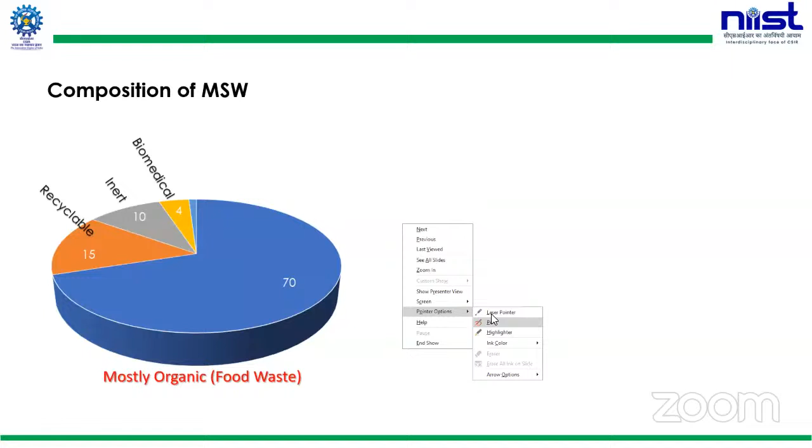So as I said, to begin with solid waste management, I mentioned we'll be talking only on organic waste treatment. So if you look at the composition of MSW, which stands for municipal solid waste, most of the fraction, roughly around 70% of the municipal solid waste, is organic fraction or the food-based fraction. And the recyclable fraction will be around 15%: plastic, paper, glass, electronic waste, all those things come under that category.

There'll be 10% inert material, and biomedical waste that we have to consider separately. In fact, the hazardous waste comes under this biomedical category, and that comes to around 4%, and there is another 1% fraction that we are not considering. So this 70% is a major component of the municipal solid waste.

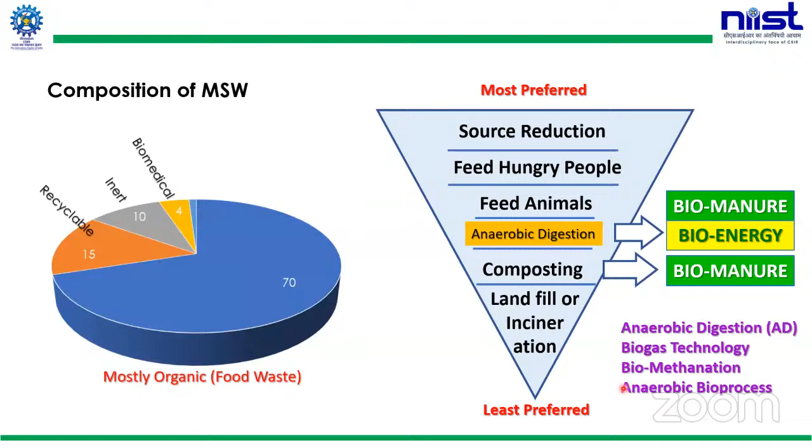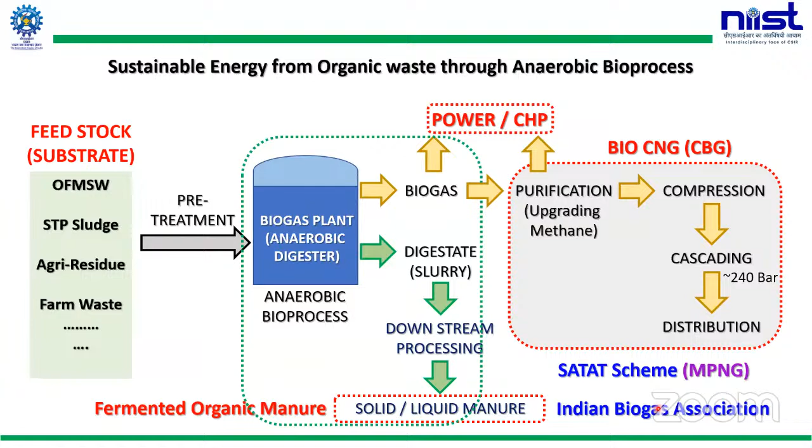Now, I mentioned the SATAT scheme. SATAT stands for Sustainable Alternative Towards Affordable Transportation, which was initiated by the Government of India in 2018 under the National Policy on Biofuels. As I said, it's a very highly ambitious program of the Government of India. The major objectives of the SATAT scheme are to utilize the bio-waste in our country to reduce import dependence on natural gas.

You may be surprised to know we are producing only 7% of our total natural gas consumption. The remaining 93% we are importing from other countries. So the government wanted to reduce our dependence on natural gas imports. For that, the government wanted to promote these kind of programs. Then implementing these kind of plants at different locations in the country will obviously generate a lot of employment, both in rural and urban sectors. So employment generation is another agenda of this program.

Then reduce environmental pollution due to burning of agri residues. So you may know that in the northern part of India, thousands of hectares of land are utilized for agriculture, mostly for wheat and rice. So at the end of every season, there'll be huge quantities of residues or stubble. They'll be burning it, leading to severe environmental pollution in the northern part of India.

So instead of burning this stubble, if you recover highly valuable products like biogas, that can also reduce environmental pollution. So it is estimated that India has the potential for producing nearly 60 million metric tons of CBG and proportionally reduce our dependence on energy imports.

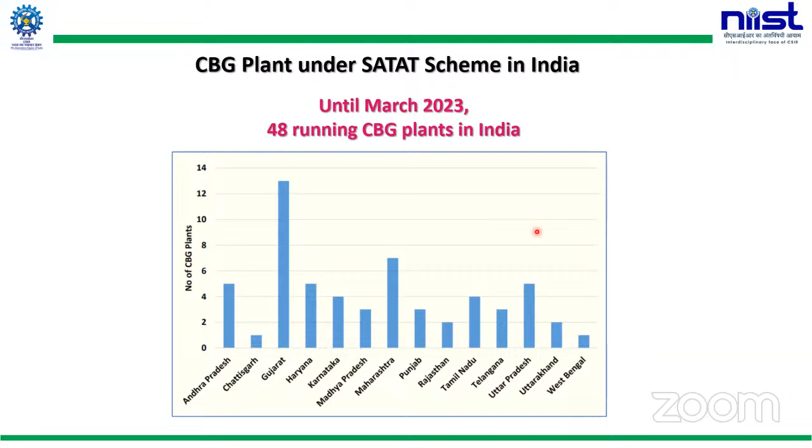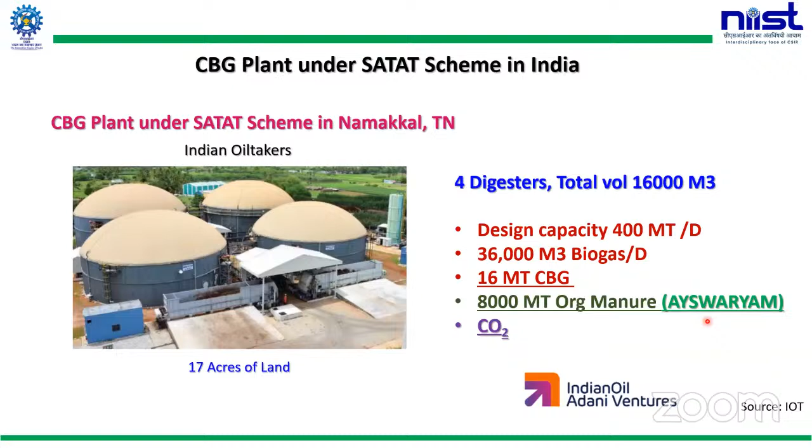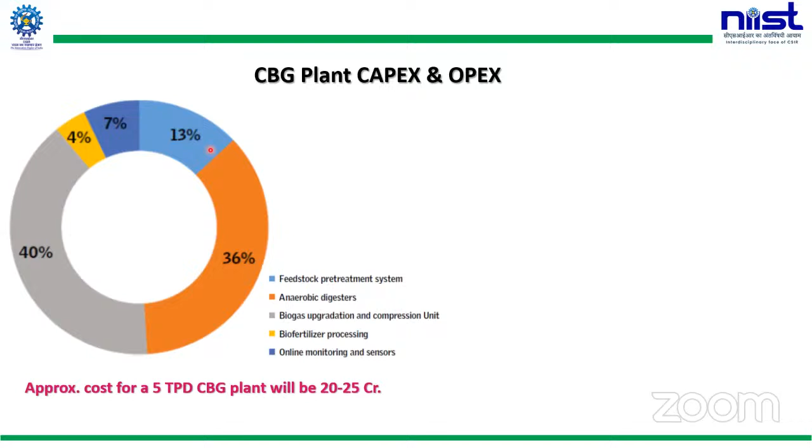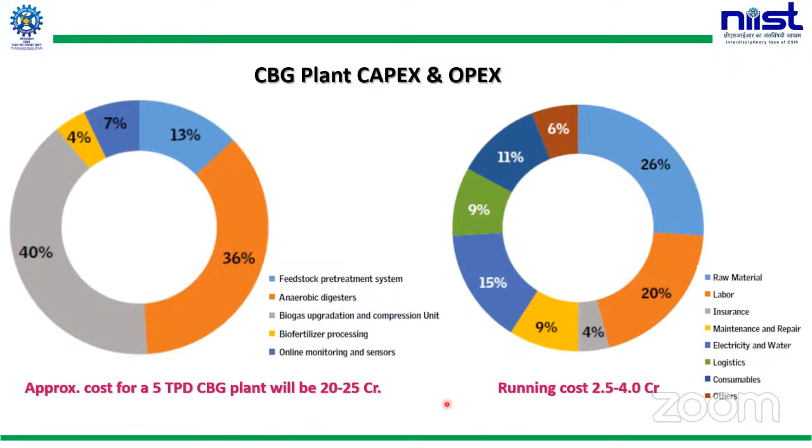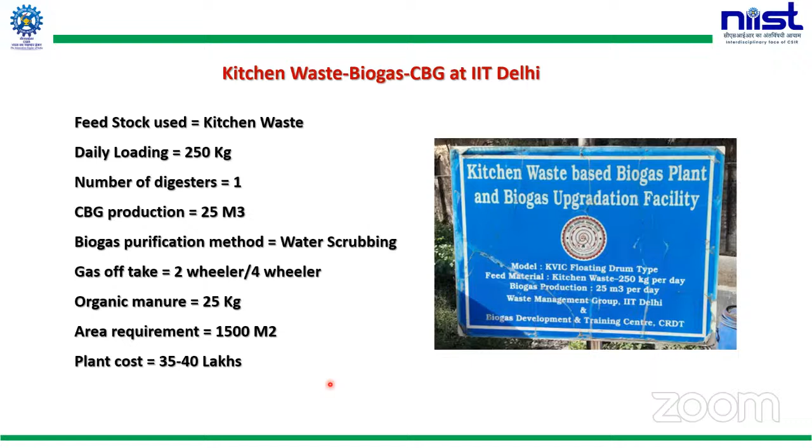Now, if you look at the CBG yield from different feedstocks, as I said, municipal solid waste will give you this biogas yield. So per ton of municipal waste, you'll get around 85 metric cube of biogas. And if you go for purification and compression, the CBG you can expect is only 34 kilo. And for 1 ton of CBG, you need nearly 29.5 tons of waste material.

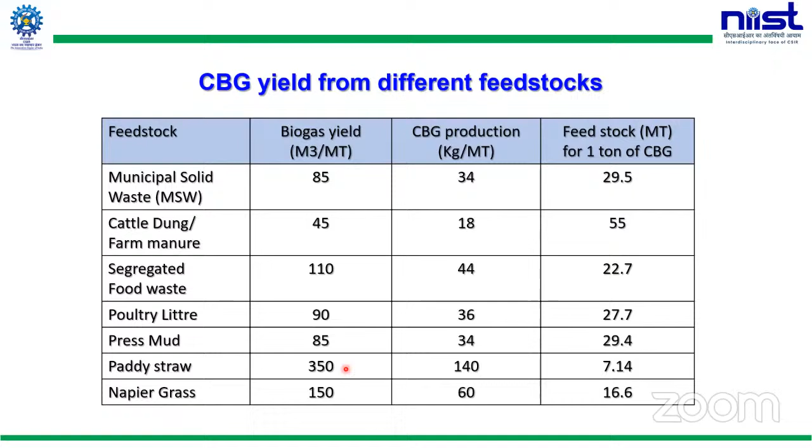And if you consider cattle dung or farm manure, it's slightly less. Poultry litter is slightly higher, press mud again in the same range, plus paddy straw is slightly on the higher side. It depends on what the biogas yield is and all those things.

So this is the BIS standard for the specification of CBG in India. As I said, the methane percentage minimum should be 90%. The mix of CO2, N2, and oxygen, maximum permissible limit is 10%. CO2 alone cannot be beyond 4%. Oxygen alone should not be beyond 0.5%. Total sulfur, including hydrogen sulfide, maximum permissible limit is only 20 milligram per meter cube. And moisture content, the maximum permissible limit is 5 milligram per meter cube.

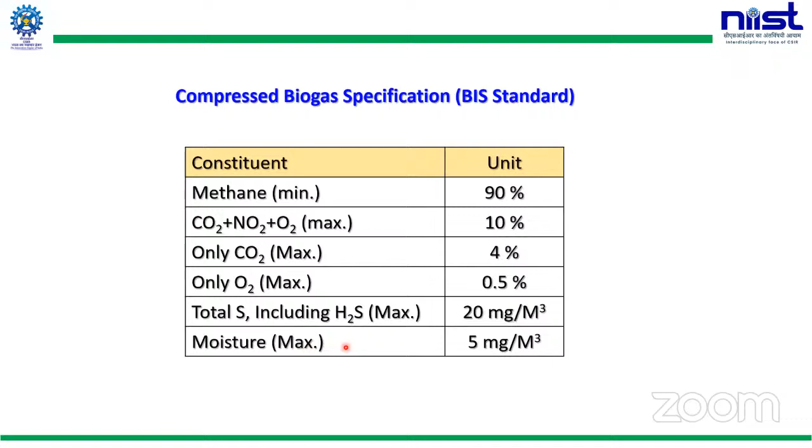Now, if you look at the multi-benefits of bioenergy recovery from bio-waste, as I said, sustainable energy recovery, cut down greenhouse gas emission, and you can earn a lot of carbon credit out of that. Carbon credit is a very broad topic; we're not going into the details of that. And it's, of course, a sustainable waste management practice, and it will also support sustainable food production through the use of organic fertilizer replacing chemical fertilizers.

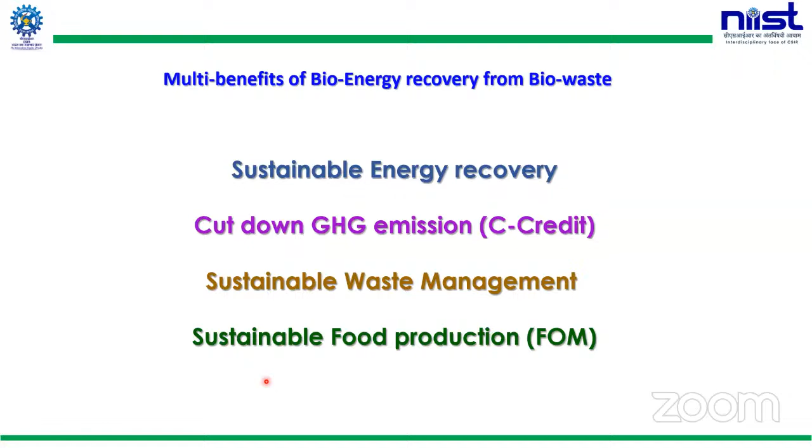So having said this broad picture, I'll draw your attention to this table, which is data from Kerala Suchitwa Mission, sanctioned decentralized waste treatment units until 2019. Suchitwa Mission is one of the nodal agencies in Kerala. They're promoting a lot of waste management practices through different subsidies. Until 2019, nearly 16 lakhs of different units have been promoted. Out of that, 90% of all the treatment units are in the composting sector. Only 10% is in the biogas sector.

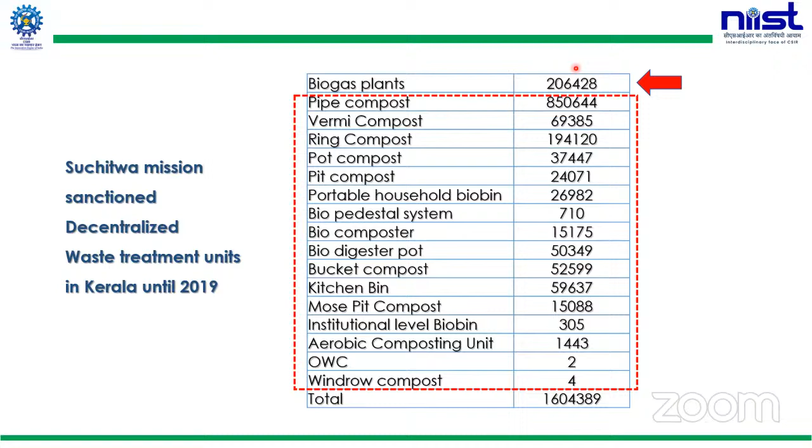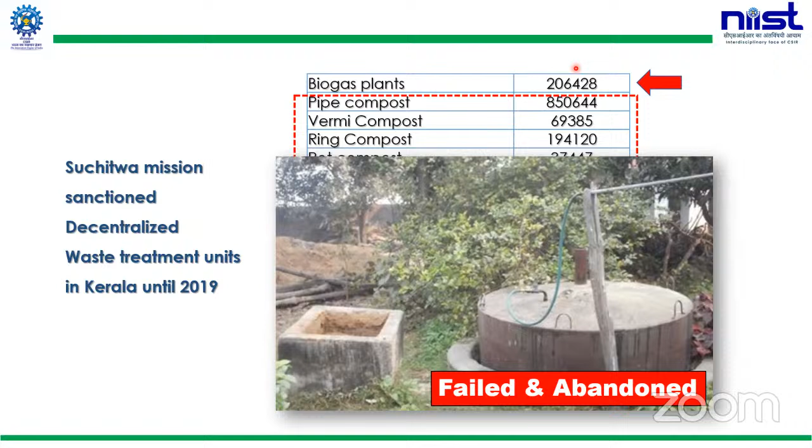And if you look at the status of these biogas plants, unfortunately, many of them have failed or are abandoned. You can see a large number of even household level biogas plants have failed, and community level biogas plants too. You can find n number of biogas plants at many locations in Kerala. They failed because of many reasons.

So if you look at biomethanation based energy systems, biomethanation is not a new technology; it's an age-old technology inspired from nature. Ruminant animals like the cow or sheep take organic residue as grass, process it within their stomach, and produce dung, which is nothing but organic manure. And it is also releasing a lot of methane into the air. A mature cow approximately releases 70 to 120 kg methane per year.

And inspired from what is happening in nature, people have developed technology. These are early designs of the biogas technology, popularly known as the KVIC model or the Deena Bandhu model, to the latest advanced design, where community level huge biogas plants handle tons of waste material, producing large quantities of biogas, from which they generate power used for many applications, including heating and electricity production. So this is how the technology development happened.

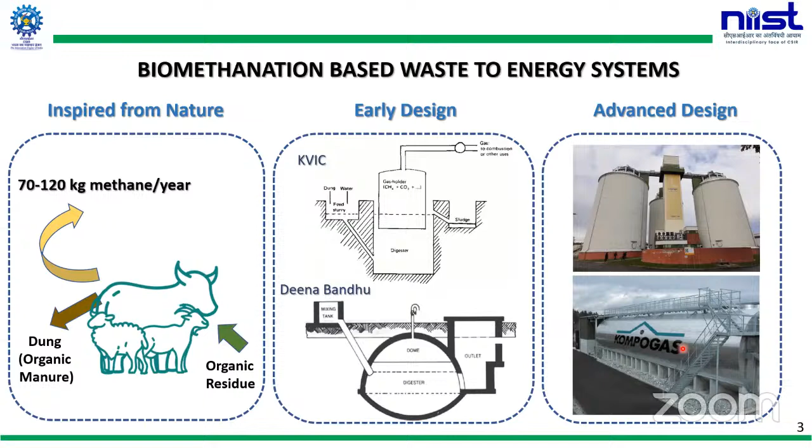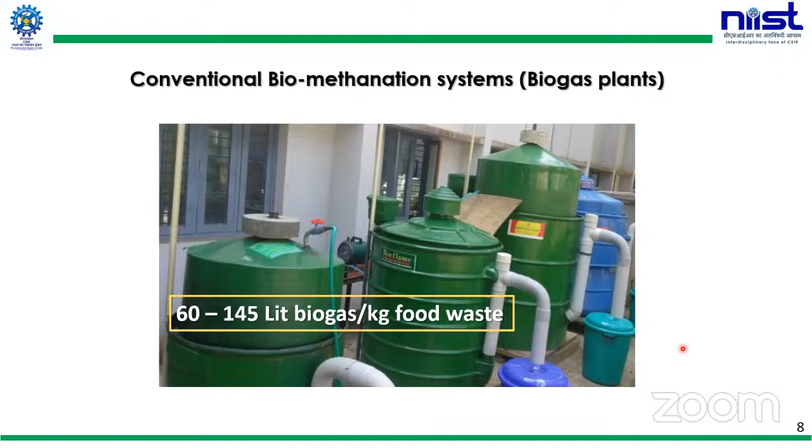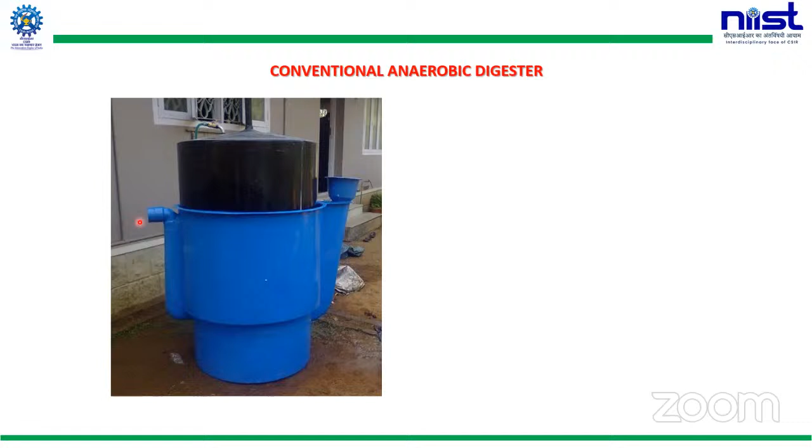And so this is conventional, the same thing as the previous image, only a single unit. What you do is add the waste material here. Something is happening inside, and the biogas gets collected here. The discharge slurry, or the manure, as I mentioned, will be coming out through here.

So if you look at the detail, this is the same port here. You'll be adding the waste material here, directly going inside. There are microorganisms that act upon the waste material and convert it into biogas. That's getting collected here in this dome. As more biogas gets accumulated here, due to buoyancy, it floats up. And you'll have a pipeline here, which directly delivers the biogas to the stove. And the slurry will be coming out through this port.

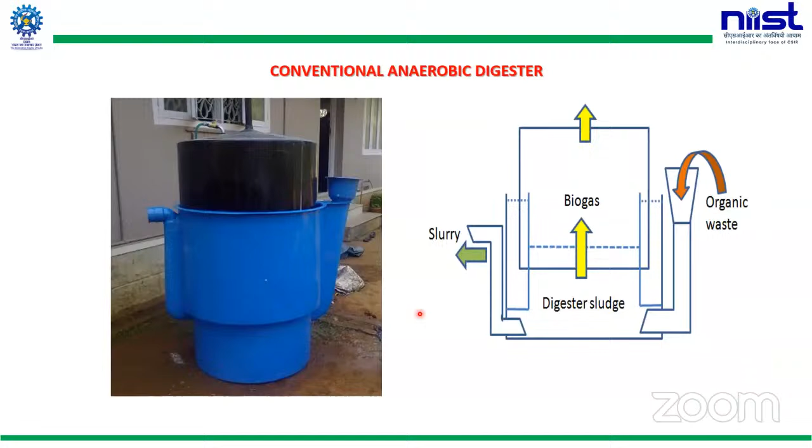And there are certain inherent drawbacks with this conventional technology, because along with the waste material, you need to add water into the system. And there are restrictions, like you should not add certain food fractions like eggshell, lemon, onion, all those things. Guidelines are there. And there is every possibility of mosquito breeding in these kinds of treatment systems.

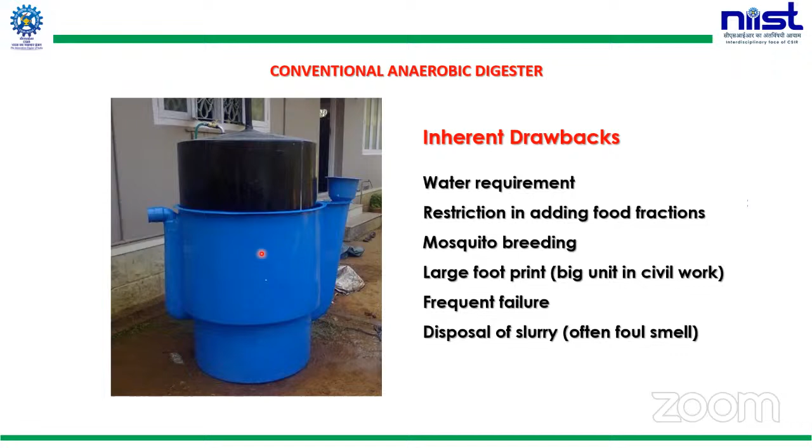And large systems, say handling 10 kg or 50 kg or even beyond that, will not be like this modular or fabricated system. They will be in civil structures, big civil structures. And once it has failed, revamping or regenerating it will be a huge task. Even emptying the system is very difficult. And not only that, these kinds of systems, as I mentioned previously, often report failure, foul smell, discharge slurry, all those issues are there actually.

So the commonly used kitchen waste biogas plants are adapted from the conventional gobar gas plant, which is designed for recovering biogas from cow dung. Cow dung is nothing but a digested organic residue. And if you apply the same method for recovering biogas from highly complex waste material, which contains fat and proteins that are very hard to digest, there comes the problem. That is why these inherent problems are coming. So some design improvements or process improvements are required, so that you can have a better system.

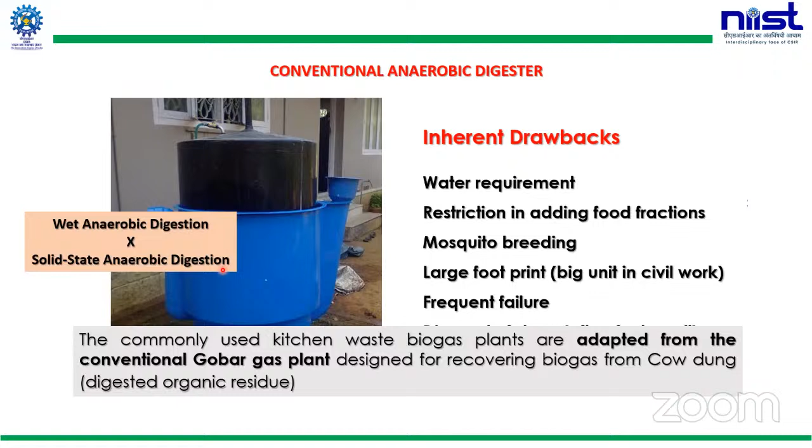So one more thing I wanted to mention here: all these conventional biogas plants I was talking about so far are called wet anaerobic digestion units. Why? Because along with the waste material, you will also be adding water. That is why it is called wet anaerobic digestion. There is another type of biogas technology, called solid state anaerobic digestion, in which you don't need to add any water, only the waste material directly. I'll be explaining that in my coming slides.

Now, a little science of biomethanation. So you know what biomethanation or biogas technology is: you're putting organic waste material into a system, and you'll be getting biogas. In fact, it is not that simple. You're putting in a solid waste material, which is nothing but a mix of carbohydrates, proteins, and fat. It undergoes a lot of biochemical changes, and finally you'll be getting biogas, which is mostly a mix of methane and carbon dioxide. So don't get confused with too much of this detail.

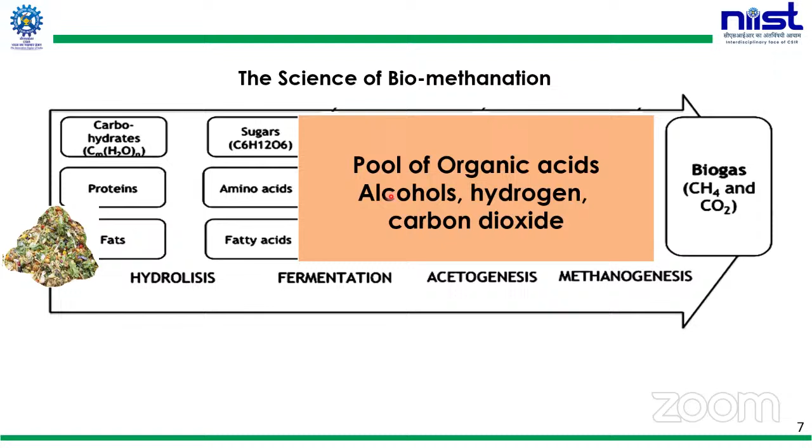Just understand that during the process of converting this solid waste material into gas, a lot of intermediates are forming. Just imagine there's a pool of organic acids, alcohol, hydrogen, carbon dioxide, and so on. All these things are finally getting converted into biogas. So this is a microbial process. A lot of microorganisms are involved. Normally we call these methane-producing bacteria, but in fact, that's a totally wrong usage. We don't call them bacteria. Of course, some bacteria are there.

But the final step, in which methane is produced, is done by an entirely different group of microbes, better called archaea. They're not bacteria. Or preferably, you can call them methanogens, those microbes that produce methane.

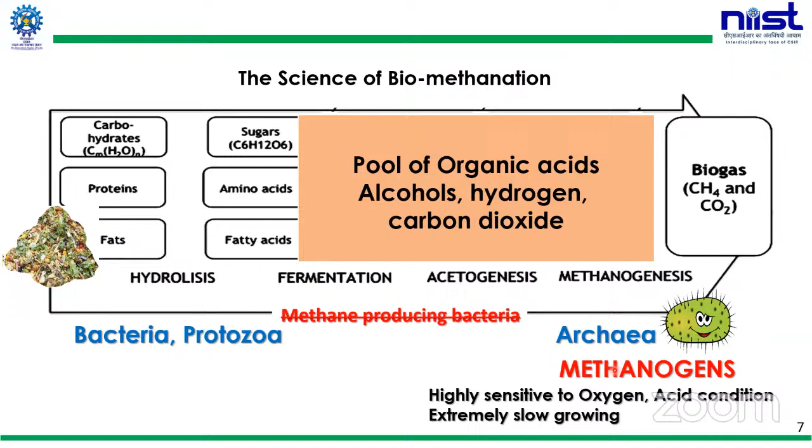And these methanogens are highly sensitive to oxygen. They're highly sensitive to acidic conditions, and they're extremely slow growing. Because of these very unique features of these microbes, if you are not providing the right conditions, your biogas system will fail. And that is one of the major reasons why many biogas plants fail. People operating the system and service providers maintaining it without a proper understanding of the science of biomethanation end up with trouble maintaining the system.

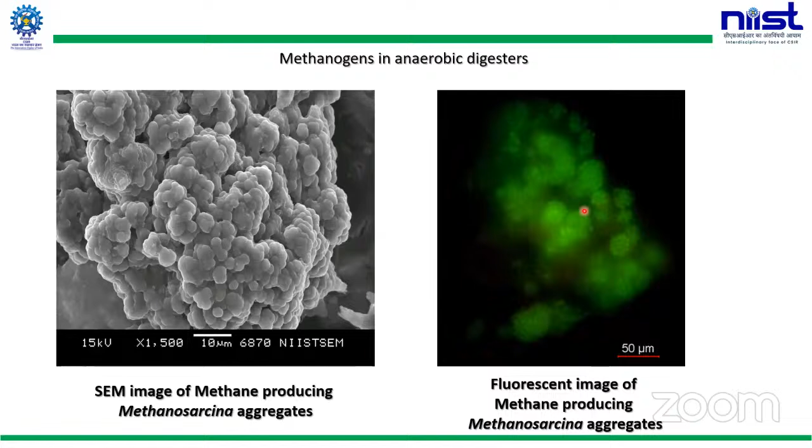So what I'm trying to say is that the successful operation and maintenance of a biomethanation system requires qualified manpower, strong technical background. There I see the involvement or participation of young innovators or entrepreneurs who are looking forward, or who would like to take this as a career. There's a huge scope for people out there who would like to enter into this sector.

And there are many basic things one should know, starting from sizing the biogas plant, what are the types of biogas plants, how to start a biogas system, what should be the mode of operation, what are the early warning signals for a biogas failure.

There are certain signals one should understand - okay, your system is going to fail, or your biogas is going to fail. There are early warning signs. We should know about all those. Only then will you be able to avoid failure of the entire system.

And if it has failed, how do you address a failed digester, and how to manage a long-term shutdown of a biogas plant? If you don't have anything to feed to a biogas plant, how long can you keep it without feeding any waste material? And if it's maintained for a long time without any feed, how do you restart it? Can we restart it as such, or is there a protocol for starting it?

And how do you address low temperature inhibition? In fact, low temperature inhibition is not a problem for Kerala, but it's a problem in North India, where sub-zero temperatures during December, January, February occur. Since this is a biological process, the microorganisms' activity will come down. At that point, how do you manage the system?

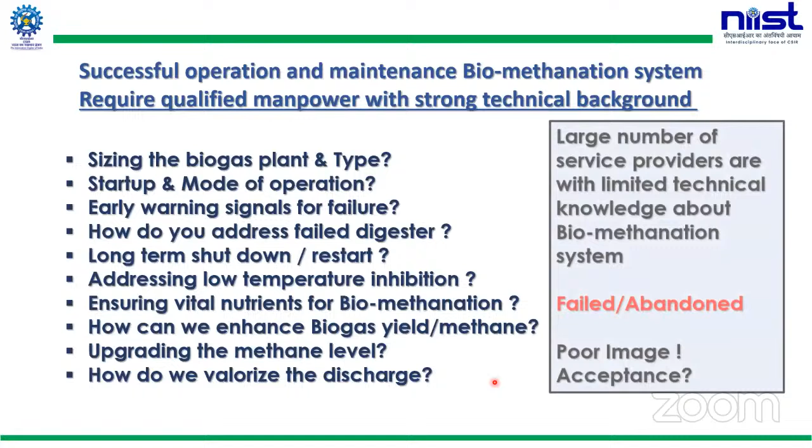And unfortunately, as I mentioned, a large number of service providers have limited technical knowledge about biomethanation systems. That's the main reason for the failure or abandonment of biogas plants, which creates a very poor image of biogas technology. The public acceptance of this kind of biogas technology is very, very poor because of this scenario.

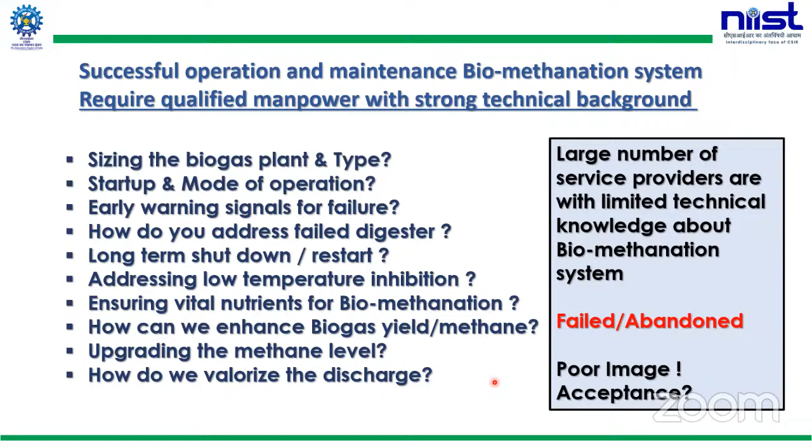Now, if you look at waste to energy systems in urban and rural scenarios, you can consider different waste materials. If you consider the urban area, organic fraction of MSW itself - 70% is more than enough, particularly the food waste. There's a huge business opportunity for youngsters to start companies that can provide biogas technology, or companies that can troubleshoot failed biogas systems. All those things you can consider.

But a limitation you may face is people asking why, when there are other options - because in cities, you may notice trucks coming in the evening to take food waste, telling people they're giving it to pig farms. So hotel operators will ask, we have options like sending it to pig farms, why do we need to install a biogas plant? This kind of question you need to address.

Then for installing a biogas plant, there'll be capital cost and maintenance costs - how do we manage these kinds of things? Another problem will be the availability of space. For a conventional biogas plant, say for a 50 kg system, you need certain space for installing the treatment system, and in cities space availability is a big problem. Also freshwater requirement for the conventional system - you need water. And where do you dispose of the discharge slurry?

So these are the technical issues or challenges you need to address when you enter into these kinds of things. So that's about the urban scenario.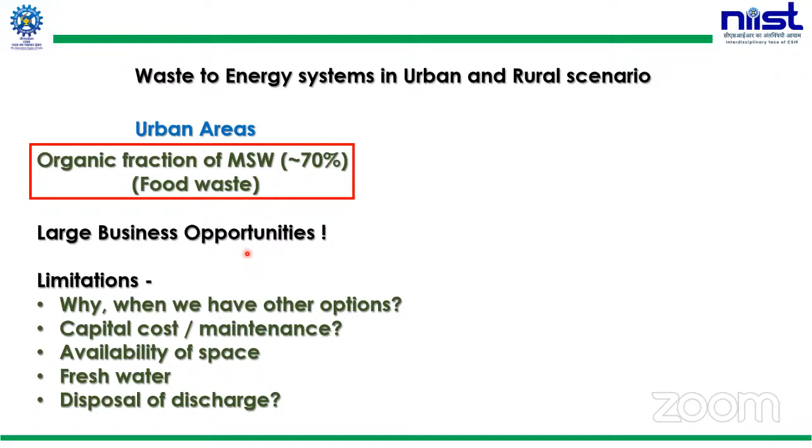In the rural scenario, waste material like agro residues, farm waste, septage, fecal sludge, and household waste are all feedstock or raw material for running a biogas plant. You can consider multi-feed or co-digestion, mixing different waste materials together and feeding them into the biogas plant. This will be a major contribution to the energy sector in rural areas, where LPG availability is limited, small-scale biogas plants can contribute significantly. Apart from energy, it will also ensure better sanitation conditions for people living in those areas.

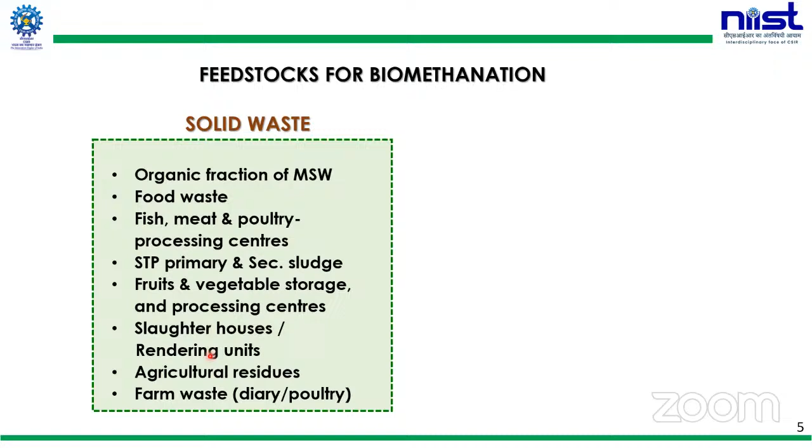This is a simple example of different feedstock one can consider for biogas recovery. In the solid waste category, the organic fraction of municipal solid waste, food waste, fish, meat, poultry processing center waste, sewage treatment plant primary and secondary sludge, fruit and vegetable storage waste, and many other things can be considered as waste material.

This table shows how much biogas one can expect from different waste materials. For example, from food waste, every kg can yield 40 to 120 liters. But if it's cattle dung, since it's already digested, the biogas yield is obviously less. Pig dung is still higher than cattle dung, and poultry litter is still higher than that. Human waste gives very little, only 20 to 30 liters per kg, and crop waste gives 35 to 40 liters of biogas per kg. So that's about the solid waste material.

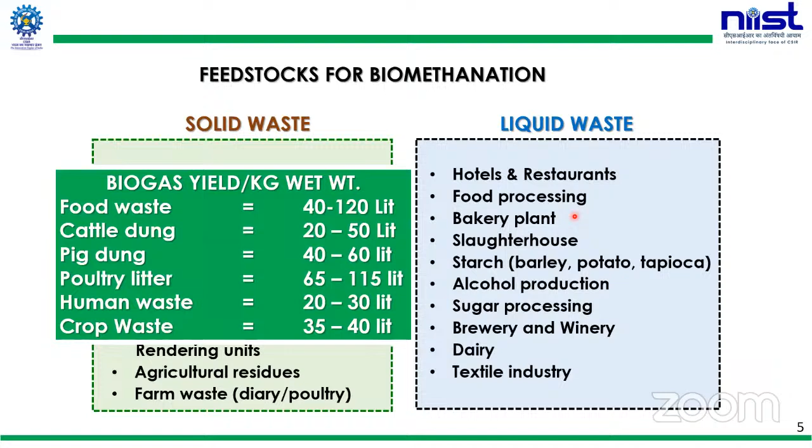You can also consider liquid waste, like wastewater from hotels and restaurants, food processing units, bakery plants, slaughterhouse, dairy, and textile industry. The waste material or wastewater from these industry sectors can also recover biogas through the anaerobic bioprocess.

I mentioned the conventional wet anaerobic digestion, and also that there is an alternate option, the solid state anaerobic digestion, in which you will not be adding any water. This is a comparative table bringing out the advantages of a solid state anaerobic digestion unit.

So this is a comparison: one is the wet or more conventional biogas plant, and the other is the solid state system. Each system handles 50 kilos. You can see the size of the digester. For the conventional biogas plant handling 50 kilos, the digester size will be something like 7,500 liters, a huge single structure. On the other hand, the solid state digester is just 2,000 liter capacity, so it occupies very little space.

Regarding water consumption, we definitely need to add water for the conventional biogas plant. Some people recommend a 1:1 ratio, others recommend a 1:3 ratio, so 50 to 150 liters of water need to be added. It need not be fresh water, but if other wastewater like kitchen wastewater is not available, you need to add fresh water.

But for the solid state system, there is no water addition. The 10 liters I mentioned here is only for final cleaning purposes. Looking at biogas yield, the wet biogas system will give a maximum of 140 liters, whereas the dry system can yield up to 200 liters.

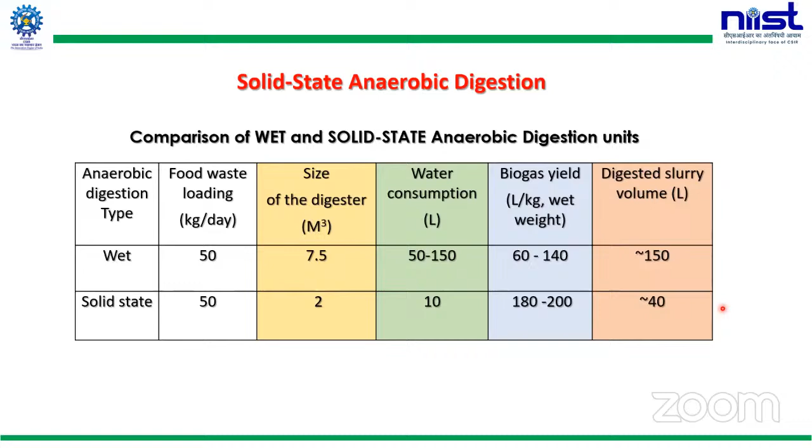This is a photograph of a solid state anaerobic digestion unit, entirely different from the conventional biogas plant familiar to all of you. It looks like this. As I said, this system is capable of handling 50 kilos per day, fabricated as a cylinder, either in mild steel or stainless steel, with 2,000 liter capacity only, and there will be a mechanical grinder here.

You'll be grinding the waste material here. Directly it goes inside, so it will be migrating through this. There is no short circuiting here - the waste materials have to travel all the distance. This is the port from where the discharge slurry will be coming out.

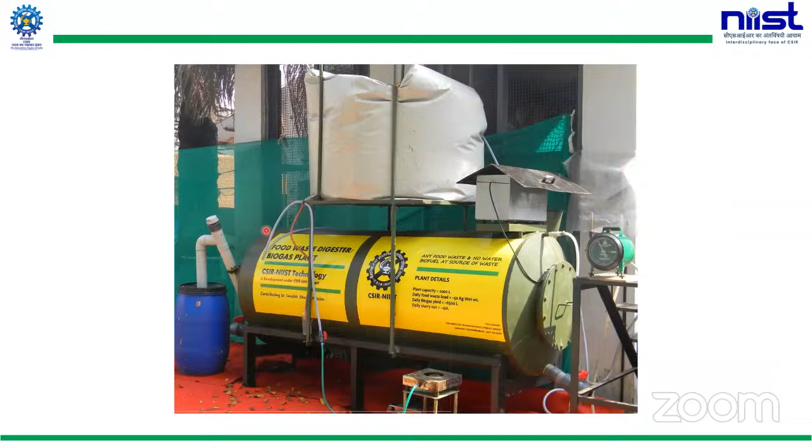Whatever biogas produced will be collecting in a high quality polymer balloon here. And there will be a small booster pump here. Even if your burner is at a long distance, it will deliver the biogas at high strength so that it will burn just like LPG.

Inside, you'll have a shaft with a lot of blades like this. You have a motor connected at this point with some electromechanical fittings, operated by the timer. Daily it will be mixing a couple of times, but the power consumption per day will be around 700, less than a unit per day.

Whatever biogas produced, as I said, will be getting collected. The capacity of this tank will be, as I mentioned, 2000 liter. Food waste up to 50 to 60 kg it can treat per day. The biogas yield will be something like 9,000 liter per day, and the methane percentage 63 to 68%.

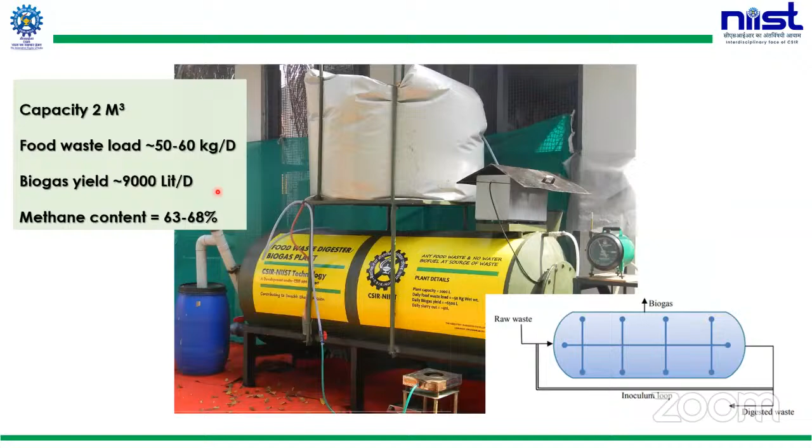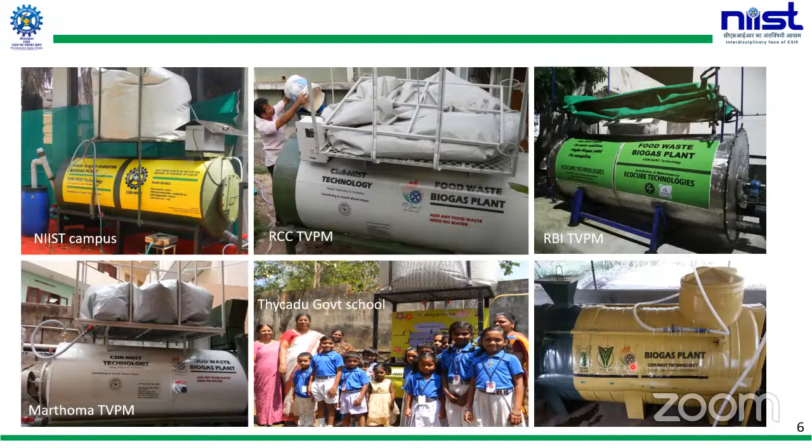But we have also installed large capacity systems. Now for a 25 apartment building, expected to generate around 50 kilo food waste per day, this kind of system will be enough. It occupies only 4 square meter area, produces around 9,000 liter biogas and 40 liters of organic manure. The installation cost will be around 3 lakhs, but if you account the biogas and organic manure, your return will be in 5 years.

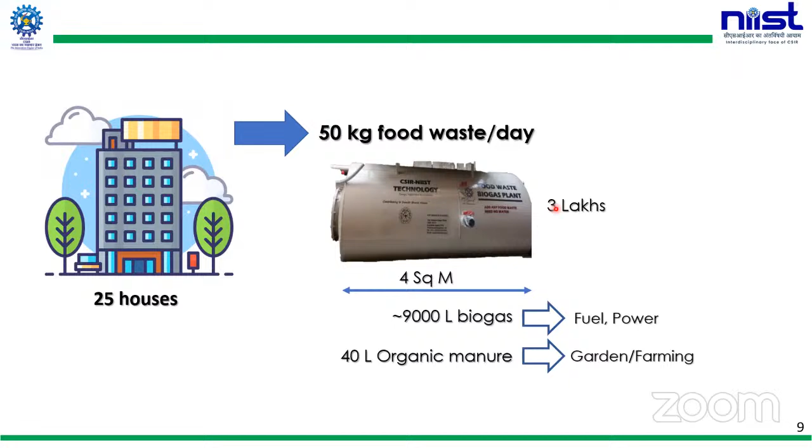So this is up to 50 kilo. We have also installed a large capacity system for the Trivandrum International Airport. The entire food waste from both the domestic and international terminal is treated in this system, which is around 500 kilo food waste per day.

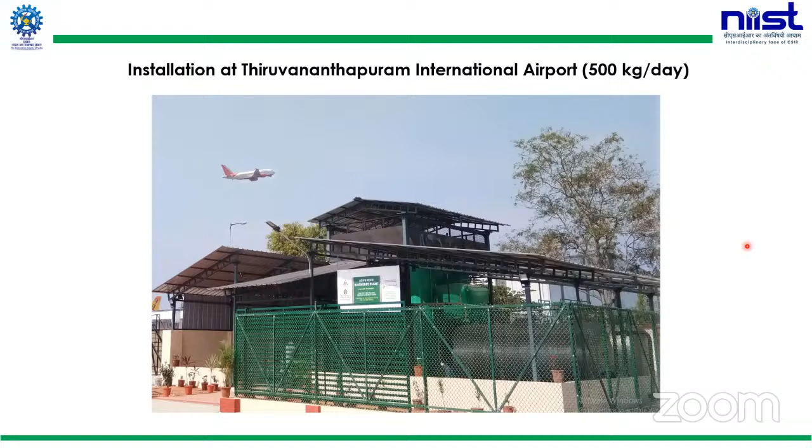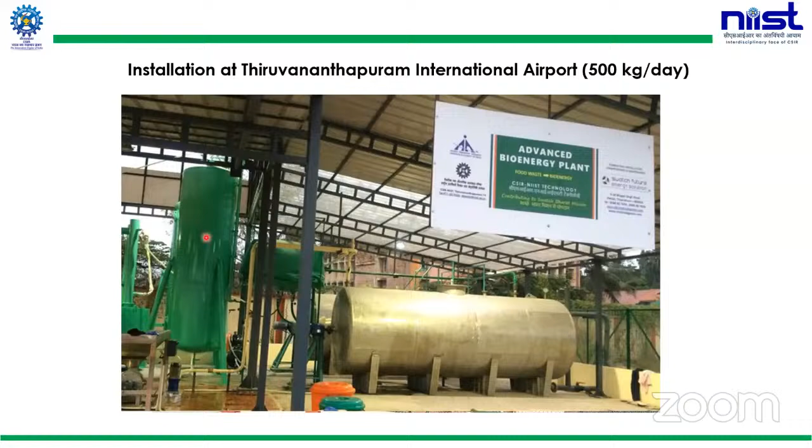We are purifying the biogas here and upgrading the methane percentage, not up to 90%, up to around 65 to 70%. Since the biogas usage is not needed at this point, what we were doing is converting it into electricity, and whatever power produced we are using for local lighting.

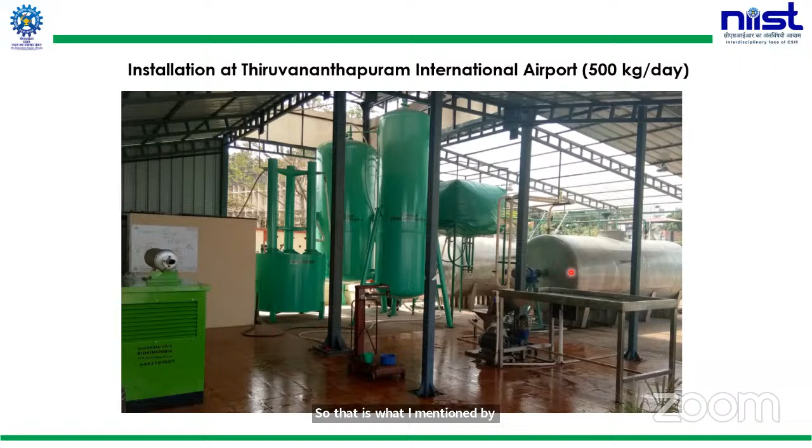So the compact size, no freshwater consumption, scalability - scalability means suppose today they have only 500 kilo per day, and tomorrow they have more food waste, the basic structure remains the same. They only need to add these bioreactors, even stacking one above the other. That's what I mentioned by scalability - you can scale up to 1 ton or even beyond that, with the basic structure remaining the same.

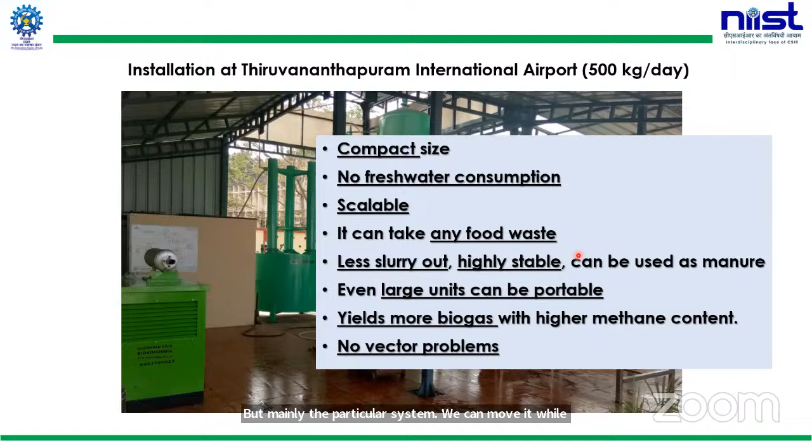It's scalable, can take any food waste, less slurry output, a highly stable system - even large units can be portable. You can move it from one place to another, particularly the 50 kilo system, even while it is working. It also yields more biogas, and there are no mosquitoes or similar vector problems.

So I'll skip this slide because of the paucity of time. So that was about the solid waste management. And I'll pass on to the liquid waste management, particularly the community waste treatment.

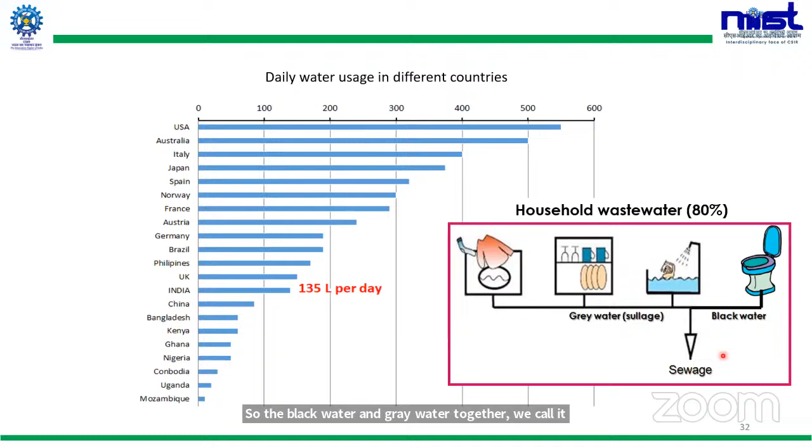Now in cities, we have houses with a sewerage network. All the places may not be connected with the sewerage network, but the main part of major cities will have the sewerage network. So from individual houses, you have the sewerage network. And you may also have pumping stations in it and manholes, of course, you may be knowing. So the sewerage line finally ends up at a common sewage treatment plant, and the sewage undergoes treatment here.

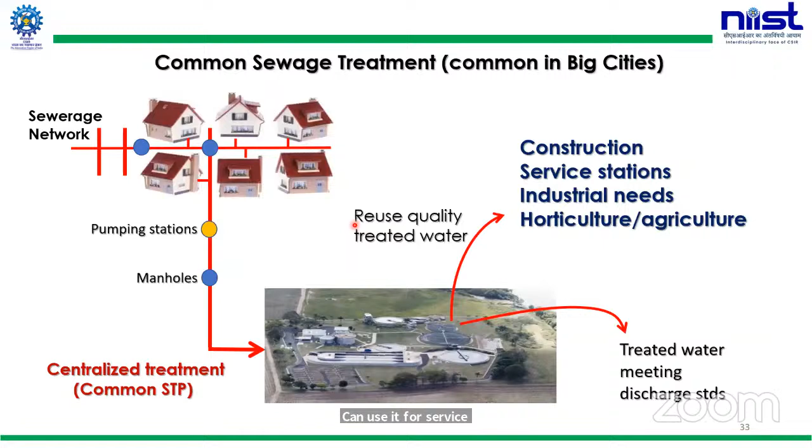And the treated water meeting the discharge standards, either you can dispose it or we can take it for different reuse applications. Like for construction purposes, you can use it for service stations, you can use it for different industrial needs. You can also consider it for horticulture or agriculture, especially for maintaining the city greenery and all those things.

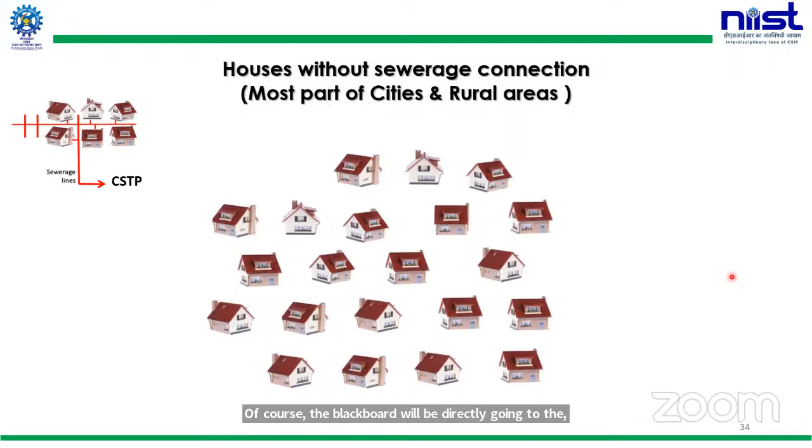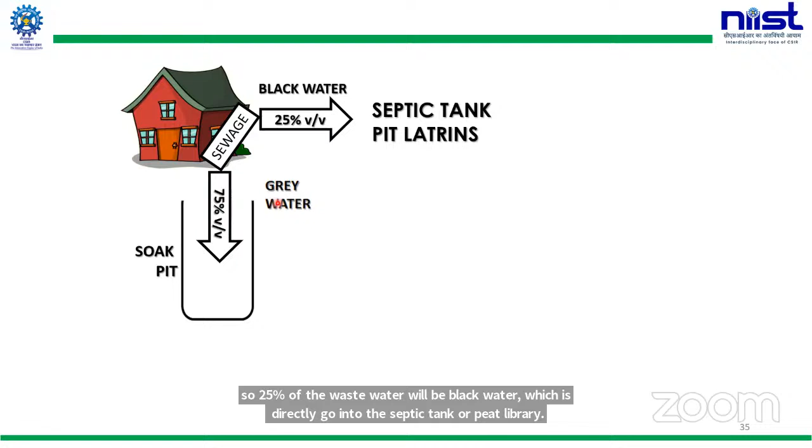But suppose there is another scenario with a large number of houses without any sewerage connection. This is the situation in many cities, and rural areas definitely don't have any sewerage connection. How do they manage their wastewater? Of course, the black water will be directly going to the septic tank or pit latrines. And how about the grey water? If you look at the wastewater disposal from a house, 25% of the wastewater will be black water, which is directly going to the septic tank or pit latrine. And 75%, which we call the grey water, we are directly disposing into the soil.

And the septic tanks, these are the kind of septic tanks we follow nowadays. The functioning of these septic tanks is a bit doubtful. But anyway, we are adopting those kinds of systems. And the overflow from these septic tanks, we are least bothered about, or we may use some kind of soak pit, which is not safe to dispose that kind of wastewater. And how about the fecal sludge? We're not going into the details of those things. I just wanted to pose those questions to you.

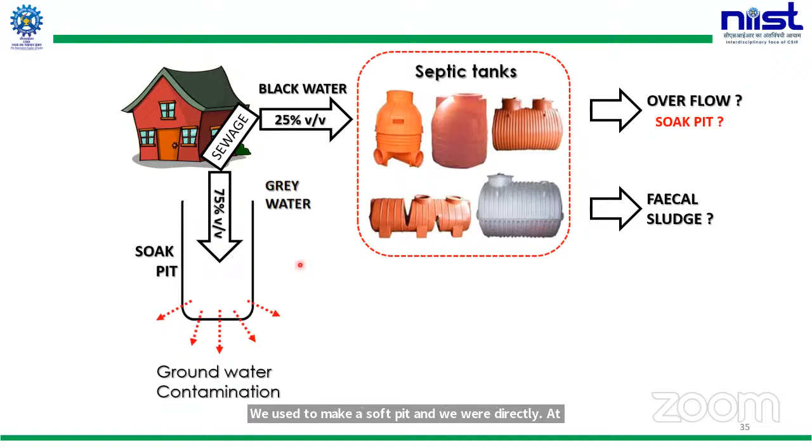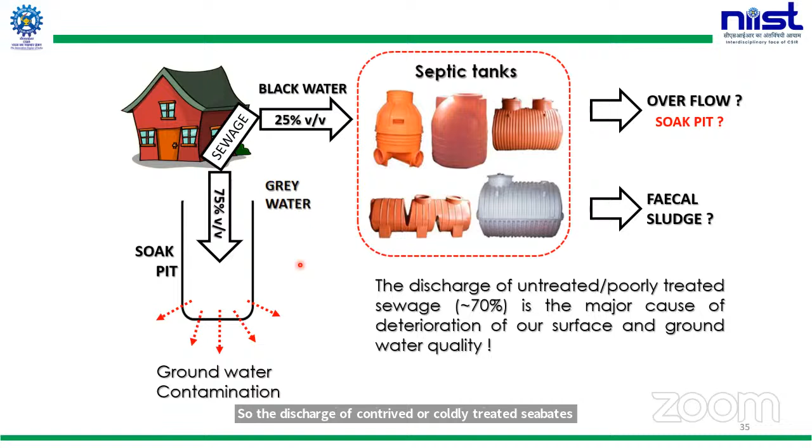And coming to the grey water, this is a very common practice. We used to make a soak pit and we directly dispose nearly 75% of the grey water into the soak pit, which can directly contaminate our groundwater. So the discharge of untreated or poorly treated sewage, accounting for 70%, is the major cause of deterioration of our surface and groundwater quality. And emerging issues like antibiotic resistance and related public issues are there.

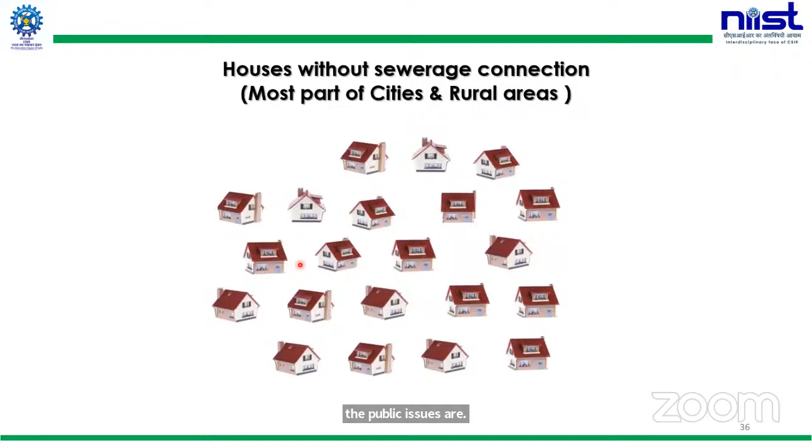Now, houses without a sewerage network, how do we address this problem? Can we consider something like this? A couple of houses together can have a treatment system. This will avoid the problem of establishing an elaborate sewerage network in cities without sewerage. So this is one option before us. We can have a treatment system for a couple of houses together, and the treated water we can reuse for different applications, at least for external applications, so that we can bring down the freshwater consumption at the household level. Or can we consider a treatment system for individual houses, at least for the grey water?

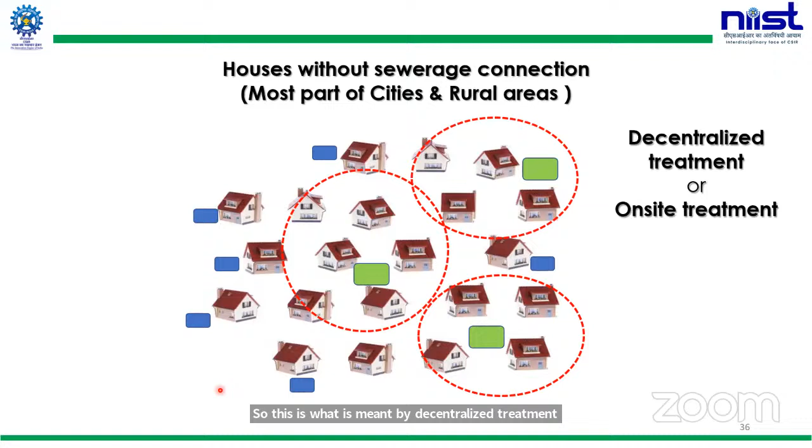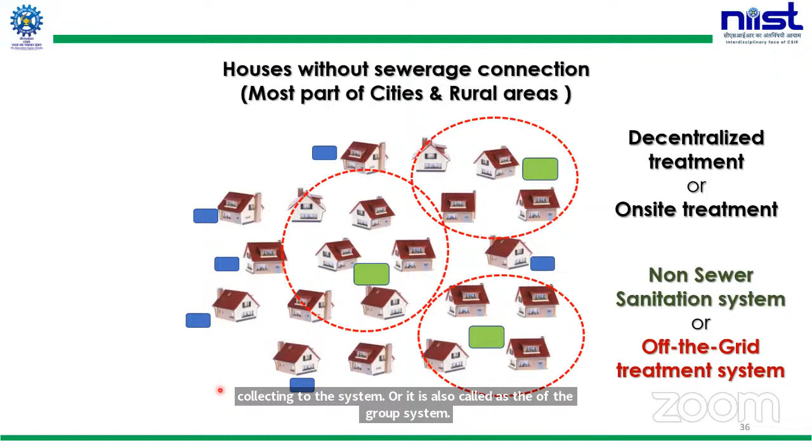And there is another issue. I'll skip this because of the time.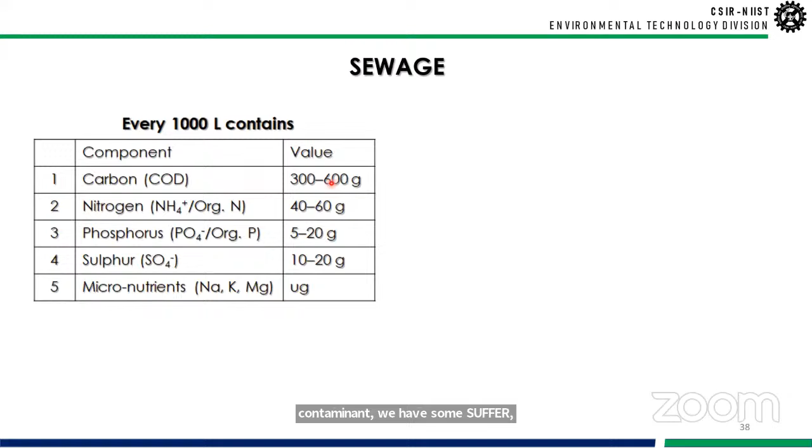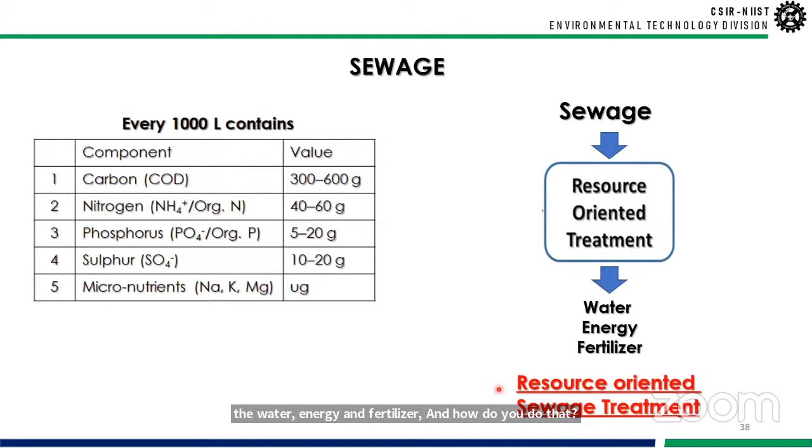Now, if you consider sewage, every 1,000 liters of sewage will have carbon in it as a contaminant, will have some nitrogen, some phosphorus, sulfur, some micronutrients, all those things. And if you remove all those things, the remaining is nothing but water. Clean water, it can be reused. So if you have something like a resource-oriented treatment system, the sewage can be treated, and different resources like reuse quality water, energy, and fertilizer can be recovered. And how do you do that? So this is what we mean by the term resource-oriented sewage treatment, or at least resource-oriented grey water treatment.

So this is the general scheme for the treatment system. You can treat up to any level. You can treat up to potable quality. The sewage can be treated, and we can generate even potable water out of that. But depending on the extent of treatment, the cost will definitely increase. So initially, at least you can remove the major contaminants, organic contaminants. Let the nutrients be there, and that water you can use for irrigation purposes, for agriculture purposes.

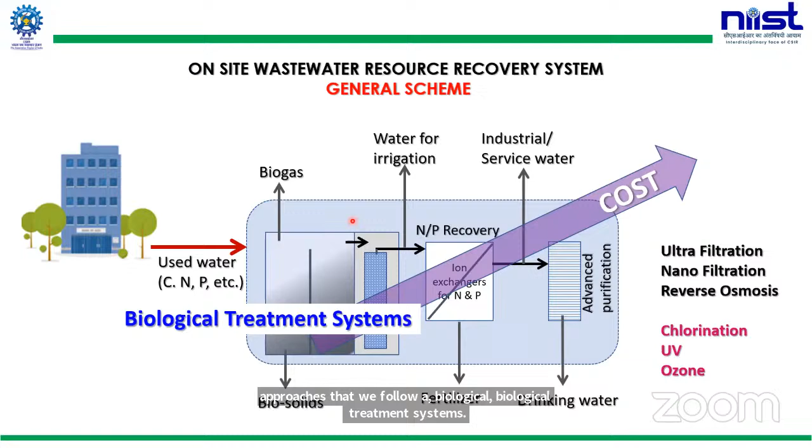And you can still remove the nutrients by installing some ion exchange resins and all those things. Once you remove those kinds of contaminants, you can use the water for industrial or service water. And still, as I mentioned, if you remove all the micro contaminants, all the contaminants, you can bring it up to potable quality. So most of these initial treatment systems or approaches that we follow are biological treatment systems, because nature-based treatment systems are more sustainable or more environment friendly.

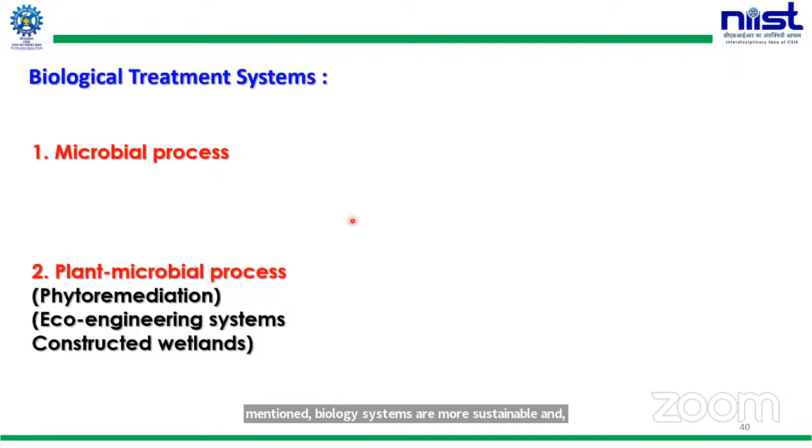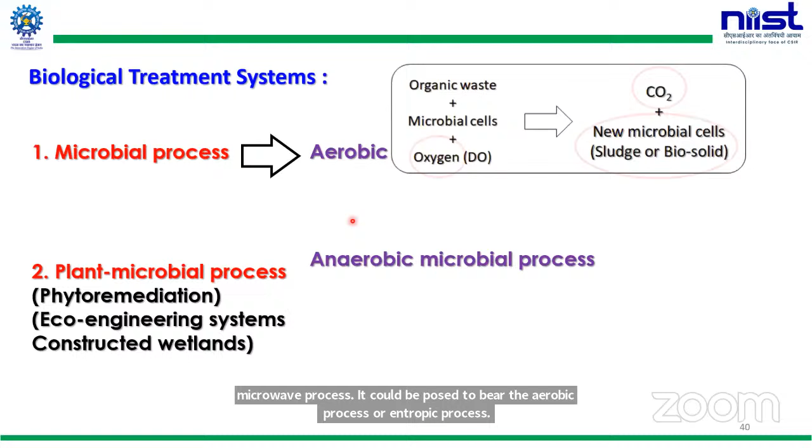So if you look at the biological treatment systems, I mentioned biological systems are more sustainable and environment friendly. Mainly you can group them into two. One is a microbial process and another is the plant microbial process. Microbial process could be either aerobic or anaerobic. It depends on the kind of microorganism that you use. So I'll just speed up. And this table, it will be better if you just have a look at it.

This shows the carbon and energy balance of the aerobic and anaerobic microbial systems. If you go for aerobic treatment systems, it's an energy hungry process in the sense that continuously you need to aerate the system. It's an energy intensive process, and you end up with carbon dioxide, and 50% of your organic contaminant is getting converted to biomass. That is nothing but sludge. It's another solid waste that you need to manage.

But instead, if you go for an anaerobic system, only 5% of your carbon is getting converted to biomass, and the rest 95% you'll be recovering as biogas. Similarly the energy balance also. So why I'm telling all these things is that, depending on the nature of your wastewater, you either opt for an anaerobic treatment system or aerobic treatment systems.

So these are some of the examples of existing technology for on-site or decentralized wastewater treatment systems, like the moving bed biofilm reactor or MBBR technology, or the sequencing batch reactor, SBR. Johkaso is a Japanese technology. DEWATS is a generic term for a decentralized wastewater treatment system. And Phytorid is a plant microbial treatment system. All these systems are not suitable for high-strength wastewater, typically from a small hotel, restaurant or catering unit. This kind of wastewater cannot be treated by these existing technologies; you need other treatment technologies.

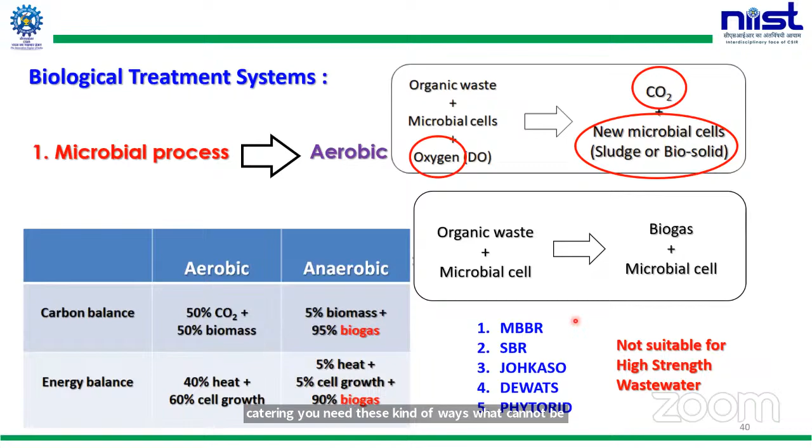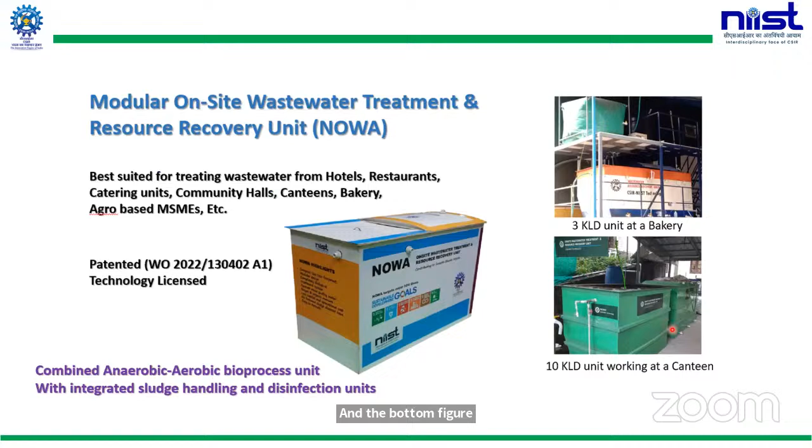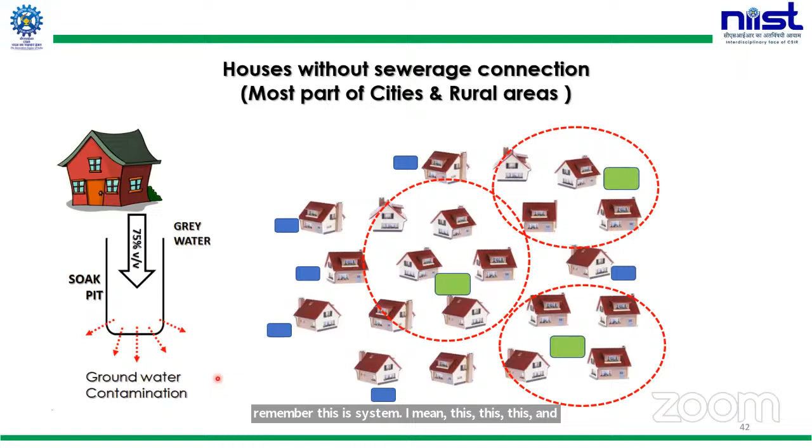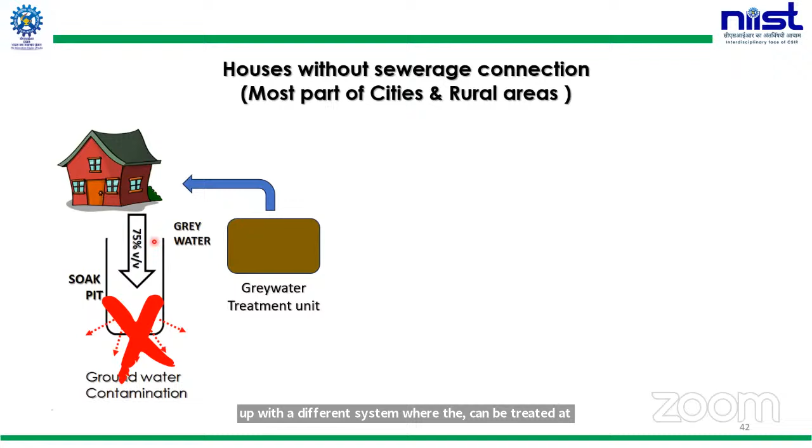So these kind of systems can be implemented, and you remember this slide I have presented, the problem with the grey water disposal. So can we come up with some kind of a treatment system for treating the grey water? Instead of disposing the wastewater in a soak pit, can we come up with a treatment system where the grey water can be treated at household level and the treated water can be reused, at least for external purposes? So we developed something like this.

This is a household grey water treatment and reuse system. This is something like a small garden; it can function as a part of your garden. The grey water we can directly introduce into this system. This system need not be above the surface. It can be underground also; only the top one feet or half a feet will be above the soil.

So whatever grey water, the wastewater from your kitchen or whatever it is, you can directly feed into the system. The treated water coming out of the system is safe to dispose. It's safe to dispose for groundwater recharging, or you can use it for watering your garden.

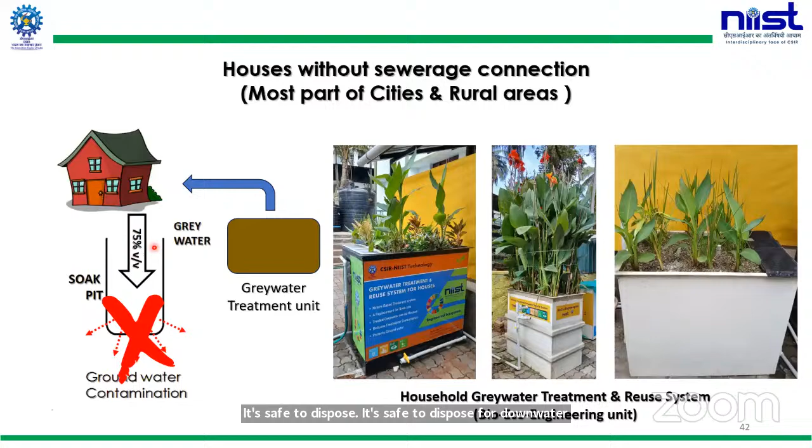So this is a community level treatment. The previous one was for individual houses, and this is for community. This is one system functioning in our campus. The staff apartments' wastewater, all the grey water, we pool together. We pass it through an initial anaerobic system, followed by an eco-engineering system. We are generating reuse quality water.

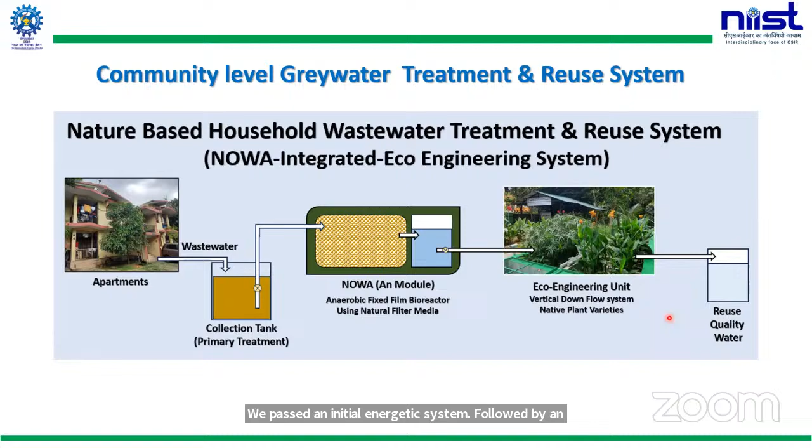So this is a photograph. This is an eco-engineering unit. Our apartments are here; wastewater initially undergoes some kind of treatment here. Then it passes through this plant microbial system. And you can see, this is the inlet wastewater on the right side, and you can see the quality of the treated water, reuse quality, that can be reused for many purposes.

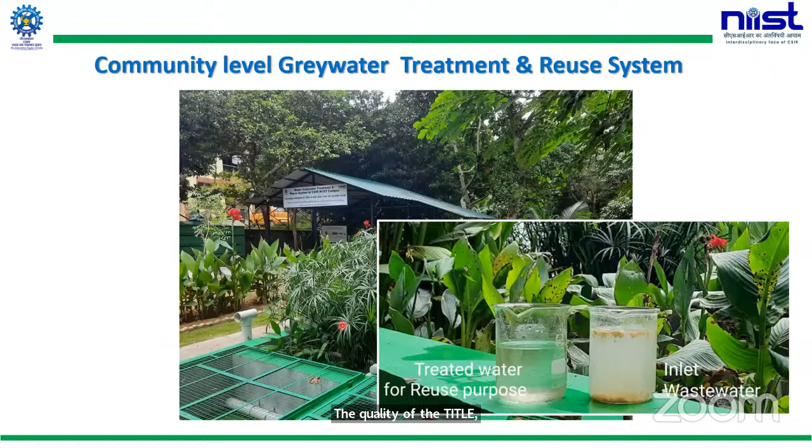I have a small video. I'll try to play it. I'm not sure whether it is going to play. It was not playing.

So I'll pass on to my last part, how NIIST can support you people. We used to organize many training programs and skill development programs, particularly in this sector: anaerobic digestion, wastewater treatment, all those sectors. You can frequently watch our website. You can join these kind of programs that will help you in your capacity building in this sector.

And if any of you have ideas or POCs, proof of concept or prototype, if you want to test it and validate it, you can come to us. We will help you. If you have a technology or process for testing and validation, we can do that. For example, organic waste converter, composting process units, or microbial inoculum. If you want to test it, validate it, take it to the next level, we can help you.

And another option is co-development. If you have an idea, if you want to co-develop the technology or your product at a different level, if you need our help, we can do it together. We can co-develop. You can use our infrastructure, our instrument facility; all those things will be available. Okay.